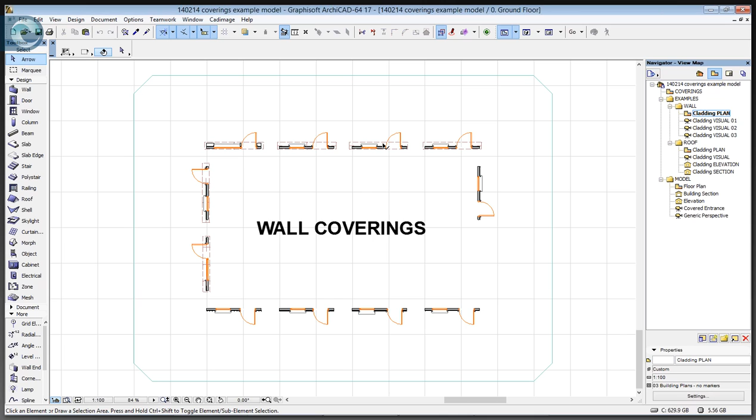If we take a look and just start off by showing you some examples, we're going to look first at some wall coverings. In 2D there's not a lot to see - we can see some of the upstands and overhangs on these particular windows, but there's not a lot to show.

So if we take a look at 3D, you can actually see what we're talking about. Don't worry too much about the hideous design of some of these elements - I've actually extracted these bits and pieces of walls with their coverings from one of the test files used during testing for upgrades or interim release upgrades through a product's lifespan, trying to throw all combinations of things at a particular surface so it can be tested.

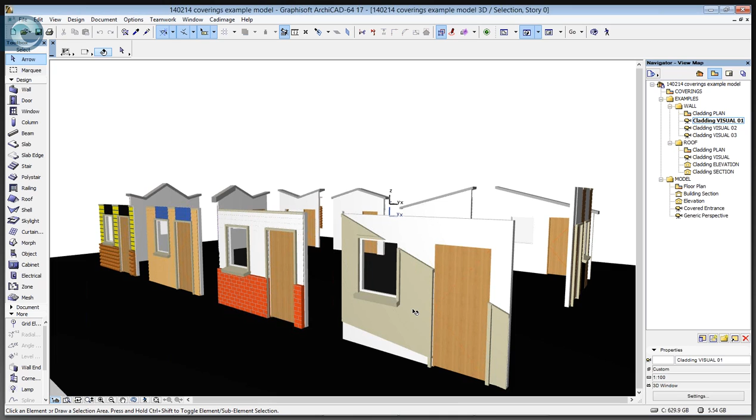You can see here, hopefully, we have different types of cladding running at all sorts of funny angles, hideous colours in different places - logs, weatherboards, tongue and groove, bricks, tiles. If we go to the other side it kind of gets worse - corrugated sheets, horizontal trimmers, vertical trimmers, trimmers that follow the profile of the roof elements.

The cladding can follow the roof or it can stop at a particular height, same for the base levels. And if I go to the final view, again you can see the random choice of colourings, but as I say, this is just to throw everything at a particular shape and check it works.

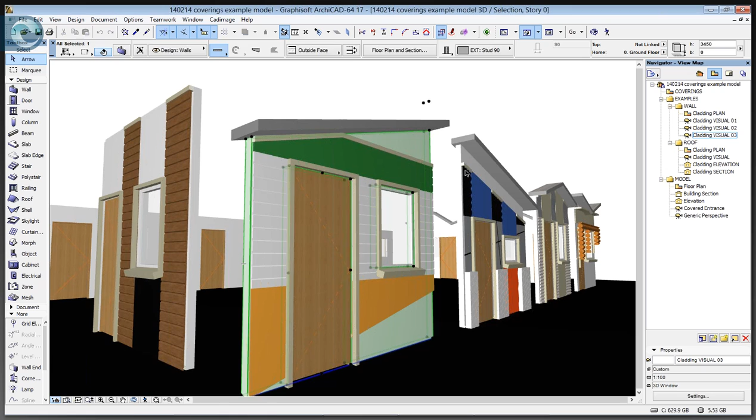The way it's actually working is the cladding is attached to a wall that sits behind the covering. As you'd expect, little things like if I take this door and delete it, the covering automatically repairs itself and reapplies across the hole that's now been filled in. So if I undo, and in the same way I'm going to stretch the window - the covering updates and heals itself, so there's not too much to worry about there.

So if I take a look at some roof cladding now, roof cladding is one of the tools that I love the most because of the way it does just the gutters and downpipes. I've spent hours and hours over the years positioning gutters and downpipes, but it's automatically created as part of our covering for a roof surface itself.

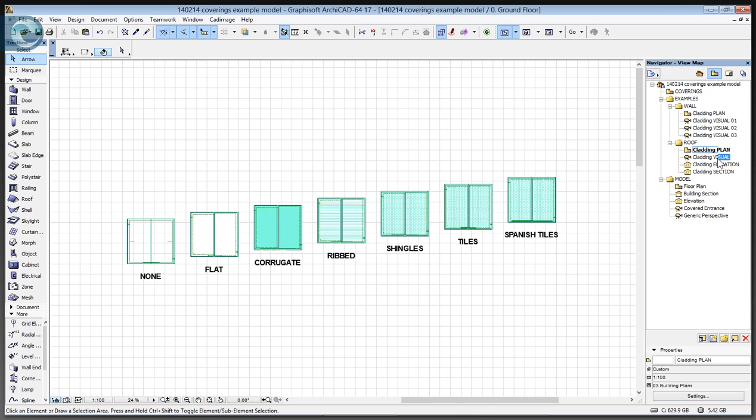There are 7 types of coverings we can apply. We can have no covering at all - let's take a look in 3D. These are just basic colours, but hopefully you can see some of the shapes going on here. Try not to navigate too much in 3D because it doesn't broadcast particularly well. The first one here is no covering at all, but that gives us the ability to have our trimmers, gutters, downpipes, fascia boards, boxed ends, whatever we want onto the roof surface itself.

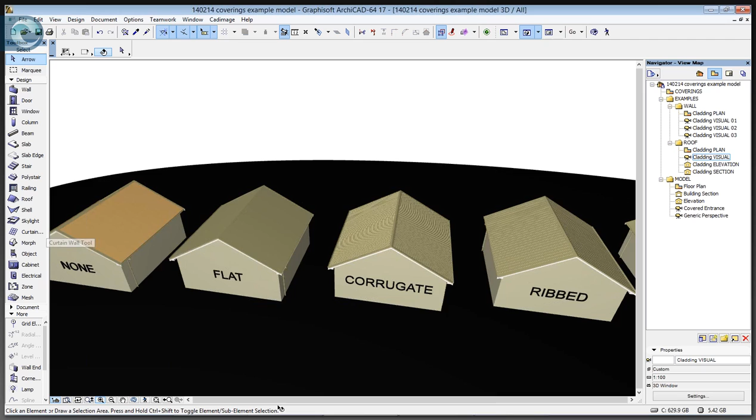There's then a flat surface which just puts, as the name suggests, a flat surface on top. We can have corrugated, ribbed, or standing seam as we'd call it more commonly here. We then have shingles, which if I select it you can see the contours a bit more clearly - I'll show you an elevation as well, but shingles are what we use in the UK to represent a slate.

We can set them to the appropriate size for that. We then have tiles, so traditional concrete tiles, and the last one here is Spanish tiles. So these are just different claddings, but all of the other trimmers and things are identical throughout the rest of the range.

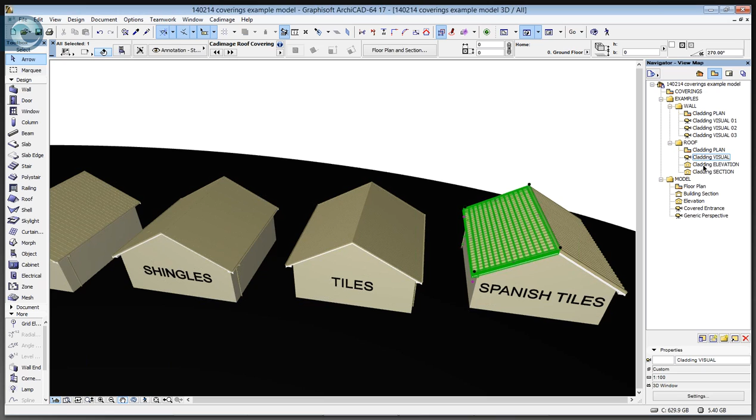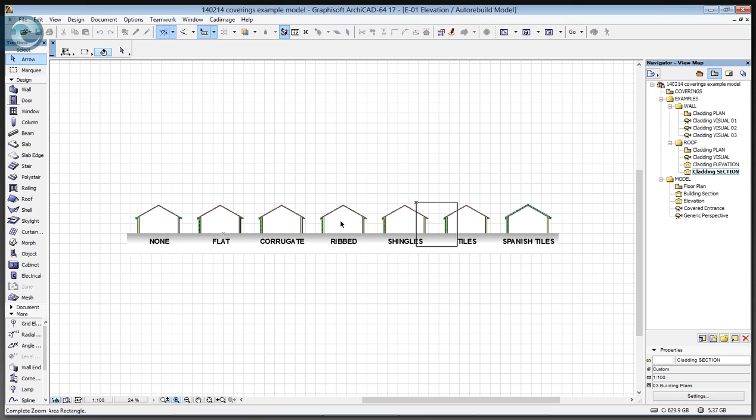Because we're not just looking at 2D, at the plan view, or the 3D, we can obviously get our elevations and sections from this same model. Again, you can see here the different surfaces. Briefly zoom in, you can see the way these appear in elevation. If I take a look at a section, maybe a section through one of these two here, you can see the gutters, the boxed ends, the soffits, the fascias, our downpipe, and all the other bits and pieces of detail that have been added here.

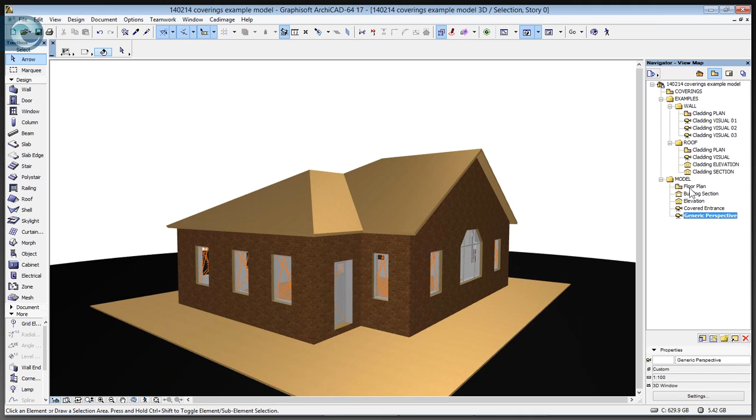So if I drop back to the floor plan, the way we add coverings is, I already showed you the pull down menu. We select an element and then we choose to add a covering to it. So let's start off with a slab. All I do is go Coverings, and I want a slab covering. What we can do here is either add a precast slab, or what I'm going to do in this case is add some decking elements.

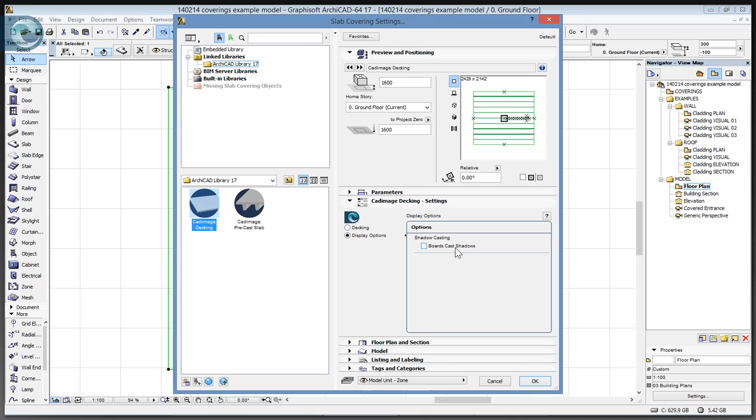In here we can choose the sizes, so I'm going to go for wide boards that are maybe 215 by 35, and I'll have a 5mm gap between them just to make sure it stands out. We can change materials - pine vertical at the moment I'll probably just leave. We can also change the appearance, the 2D appearance, what it actually looks like in terms of pens, colours, fills, etc. There's also an option for display options to choose whether or not we cast shadows with the board, so that's going to help increase the performance if we don't cast the shadows, because the chances of seeing them are pretty slim.

So it's a very simple object, and all we do is just click OK, and suddenly we have decking boards. This is an object that overlays what's underneath, so if I really want to, I can move the origin, and you'll see the boards move with it. So let's rotate it round to 315, and we now have diagonal boards across.

And then the other thing I can do is grab an edge, and we can actually put a trim board in place. So we can do that on the four edges, and that finishes off nicely what's going on in there. So that's our slabs, nice and simple.

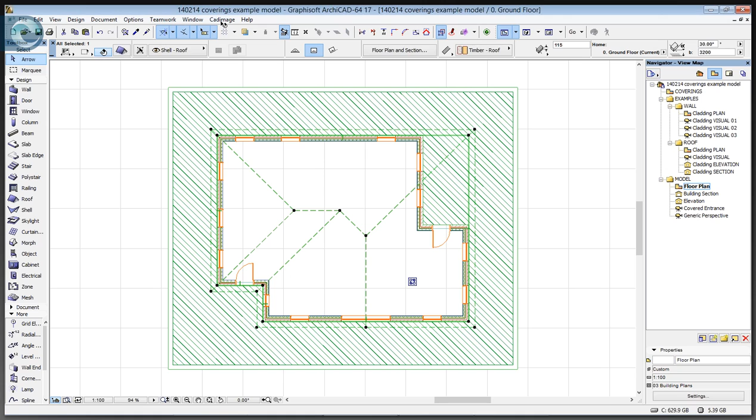But the next one I'm going to go for is the roof. So grab my roof, and again all I do is Cadimage Coverings and Roof Coverings. So in here I can play with a number of things. I can look at the default settings, but what I'll do is leave the defaults.

We actually have the ability here to pick individual faces. If we go in here, we can pick these individual edges of the roof, and then we can start to decide what type of finish it has. So we can override the ridges, the barges, the hips, the valleys, and the gutters. I'm going to start and just put something in place.

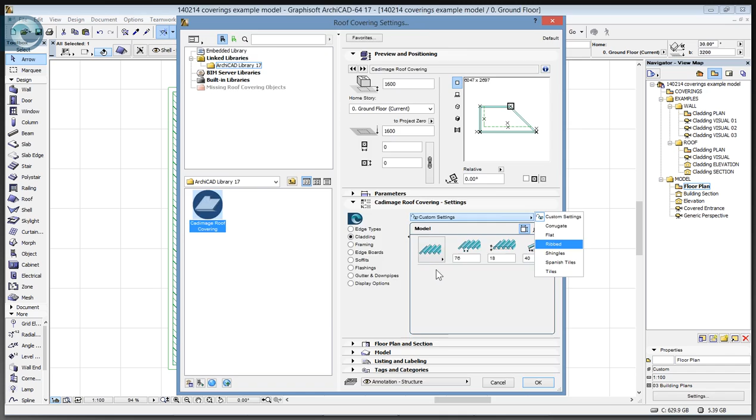So I'm going to go for cladding, and we will have shingles. If we have another look at 3D, we can now see lots of extra detail round about the roof visible up here. So if we go back to 2D, what I'm going to do is just pick up some of these roof elements to have a play with.

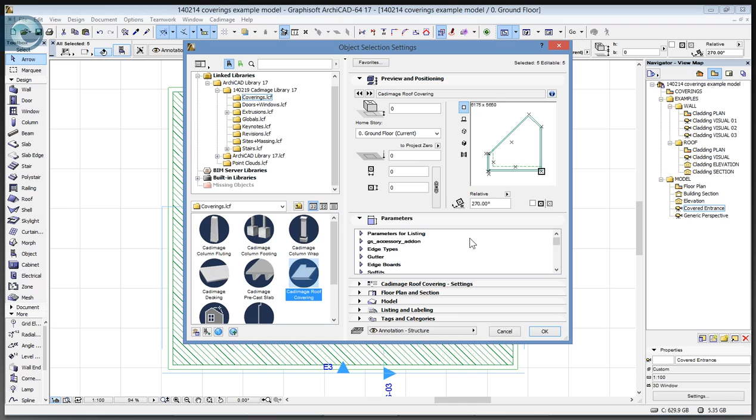We'll go into the settings, and then we can play some more with these particular settings here. So let's go for shingles. We'll set these for maybe 250 by 200. It's only 2mm thick at the moment, but a slate tile's probably 12mm, something like that.

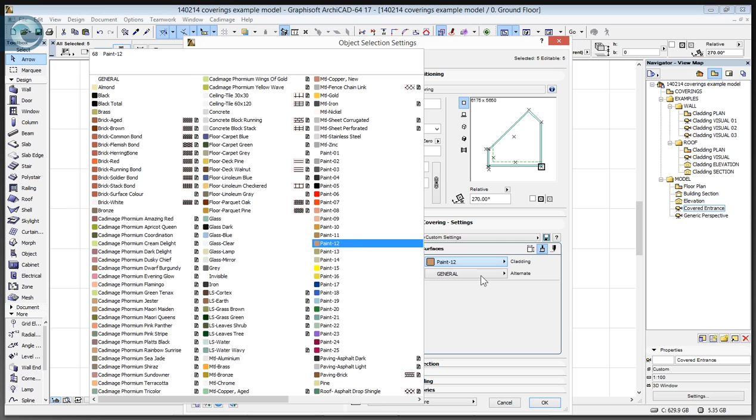Set an overhang. We have the option to change the materials, so this is going to be a sort of dark grey slate colour, and let's have a slightly darker alternate. We can then change our custom settings for the appearance, so pens, colours, fills, usual sort of stuff. We can choose to include the framing or not include the framing.

So on slates, we might want it, we might not, but it's a case of choosing what type of frame it is, what the sizes are, if the first batten is visible or not, and if we include the battens within the roof space or leave them separate. So I'm going to leave them switched off for now.

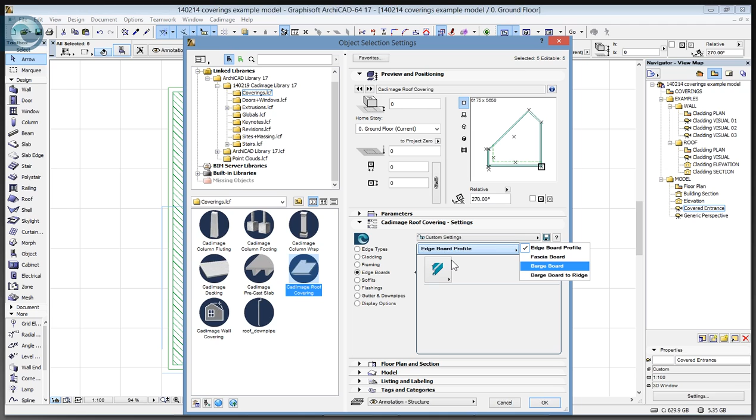We can then choose edge boards, and we have controls over fascia boards. We can set the edge board profile, we'll go for one of those. Again, we can change the materials. So the fascia, what I tend to do initially is make everything a really bright colour so you're able to see the detail of them within the model, and then come back and turn them into something reasonable. We can set the barge board to either match, or we can make it completely different, and the same for barge up to the ridge.

When I go to soffits, we have the option of flat soffits or sloping soffits. Set the various sizes for the overhangs, what we do with the ends, let's box them in. Again, we can set materials, so let's make the soffits - I've used red and yellow, so let's have blue and purple.

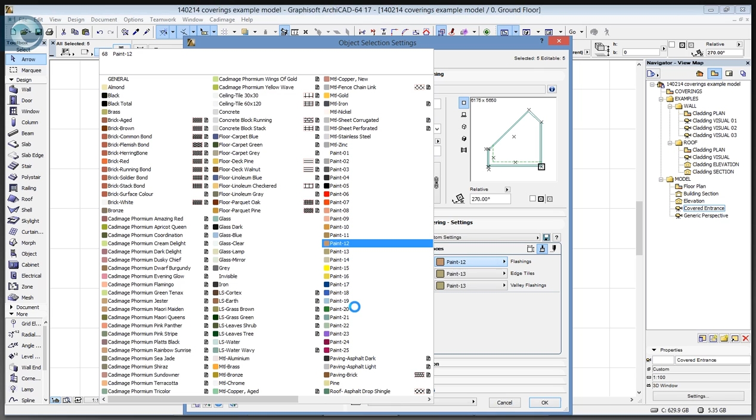We've then got control over the flashings - barge flashings, the hip, the apron, the valleys. You can go through the various settings, and there's a number of options that you can choose to give you whatever type of profile you want to be in there. So we can choose whatever options are necessary, and again there's further controls to set materials. I'm running out of hideous colours now, so let's have - I haven't used green yet. Green, dark reddy purpley colour, and there's paint 12.

Final couple of parts are the gutters and downpipes. So our gutters can form a number of different shapes. Let's go for colonial, set the various sizes, and we can set the materials. So the gutters we will make - what can we have? Let's just make them black this time.

And the downpipes, what we can do with those, they can either be round or rectangular. Again, set the sizes and the angles and the position of the brackets, the depth of the brackets, etc. But we'll just make these grey.

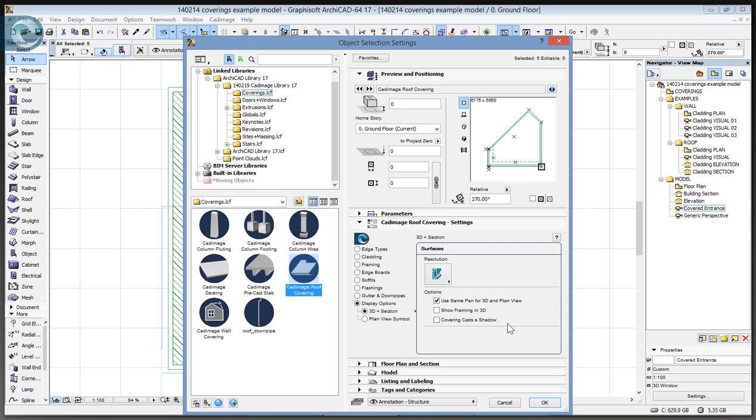Final option here is a display option. We can choose what's visible on the home story, above or below. We can set the 3D properties and the section properties, the resolution, the amount of detail, and whatever other information we need in there. So a whole load of changes.

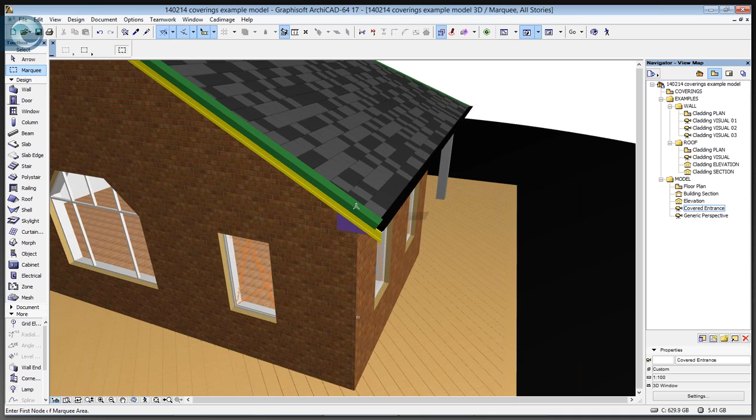If I just hit OK, what you'll see is the plan view updates, and it actually shows the tiles. You can see all sorts of hideous colours going on here, but hopefully if we spin up and come around to the edge here, you can see we have various different tiles going on, and the different types of trim. You should be able to see the gutter - it's hard to see because it's black, it might not have been a great choice after all. But you can see there's a whole load of detail that's been added there with relatively little amount of work. To do that manually would be quite considerable, and I've done it too many times.

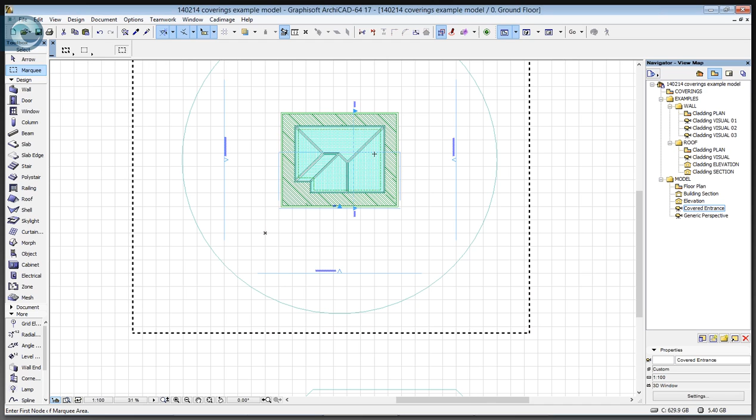So if I drop back to 2D, you'll notice there are no downpipes there, because it's up to us to choose as humans where we want them to go. So the way we actually place them is dead simple.

We select the object that is the covering, and you'll see there's a couple of hotspots on the corner. One of these is to manually cut the ends - if we were joining two completely different types of roof, we can cut the ends of the gutter off completely so that we can miter two roof sections together. The other option, the one I'm interested in, is this one here, where I just start to drag, and you'll see I've got my little profile visible, and this is the position of the downpipe.

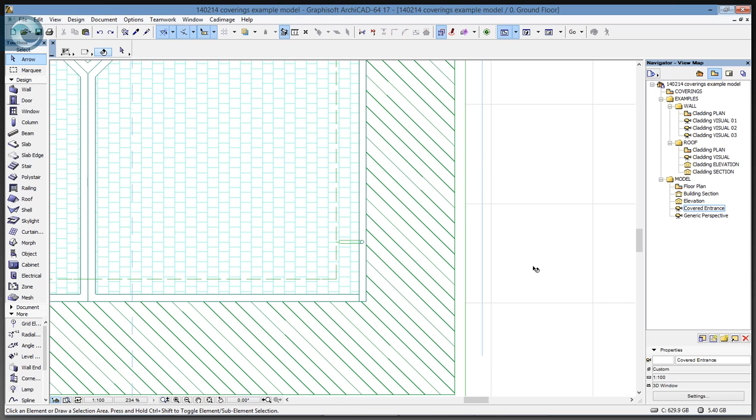So let's make it 1200 from the corner, and we'll do one more on the other side. Grab my roof, grab this, pull that in, this time make it 700. And if I go back to 3D, quick look back at 3D, you should see the downpipe's now visible. The only thing I have to do is select it and stretch it to whatever level is appropriate, so I'll take it down level with the base of the wall.

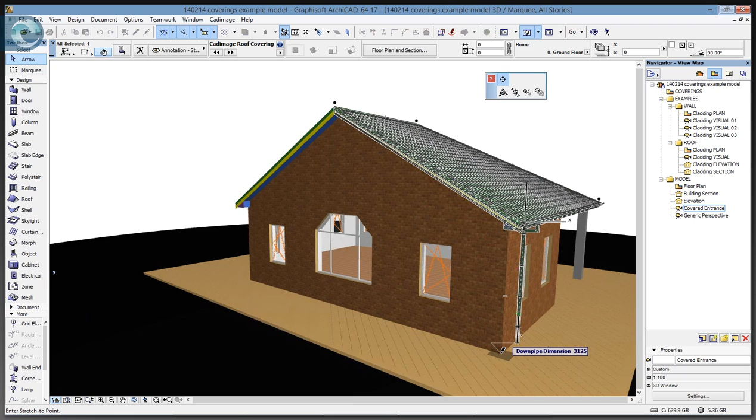So that's a roof covering with quite a bit of detail that's been added.

If we go back to 2D, what I'll do just to finish off is quickly throw in some wall coverings. So I'll grab my walls and do the usual Cadimage Coverings wall coverings. Again in here there's a number of options to look at, but I'm keeping an eye on time, so what I'll do is just choose to split into different covering types above and below the sills, and also above any openings.

So we can then set the shape. We want it to follow the wall, or we can set it flat for a particular height, follow up to a maximum height, or we can actually do custom shapes as well.

We can then move on and look at coverings. Because of what I've chosen, I've got 4 covering options. So the main covering, which is going to be the section in the middle of the wall, I might want to be panels. We can then set the panels to be, let's say, 300 high, 1200 wide, no offsets, and we'll have maybe 30mm of a gap, a shadow gap, between each panel. We can set the materials to whatever we want - I'm going to choose something that's pretty visual, so we'll go for yellow.

If we then look at below the sill, what I can choose to have here is some bricks or blocks. So we set the size - let's have 0 cavity, 100 wide, these to be 75mm high and 225 wide, and in the corners we'll go 112.5 just to offset the start point. What we can do is set the materials and colours, so we'll go for a kind of a brick type colour.

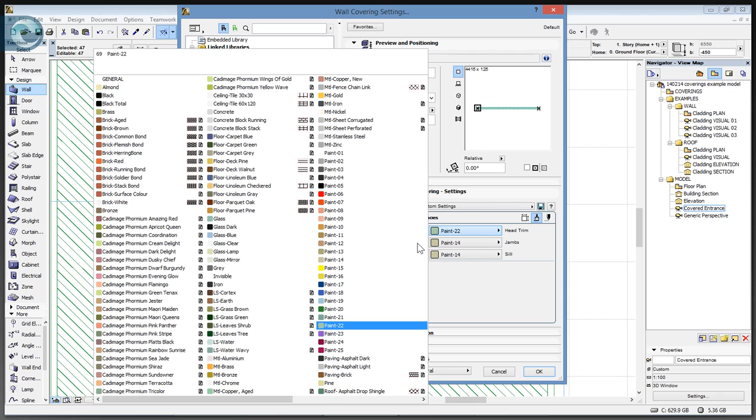We just literally grab it and off we go. So let's say the surround can be a block - set our various sizes, we'll have it above and below, set the materials so we'll have these as all green, linked together. And then the final options are again to do with the display options.

There's a whole host of options to play with. Hit OK. Final thing we do is say I want this on the outside of the walls. Hopefully you can see that now. I obviously have to do a little bit of work on the heights for the head heights of the window and the sill heights, but hopefully you can see the different surfaces - our brick below the sill level I've chosen, our cladding panels that are 1200 by I think 300 I went for, our vertical panels up here, and also our lovely log detail across the top there.

So I'm not going to be doing too much more in here. Hopefully nobody's joined that hasn't seen this before and wondered what they've actually created building-wise, but it was actually meant to be like that - that's kind of normal. All joking apart though, when I'm doing a real building with cladding like this, I do tend to work with these mad colours to begin with, because then you can identify very easily what's what, make sure the sizes and the construction's right, and then we go back and worry about the actual real finish that's going on these things.

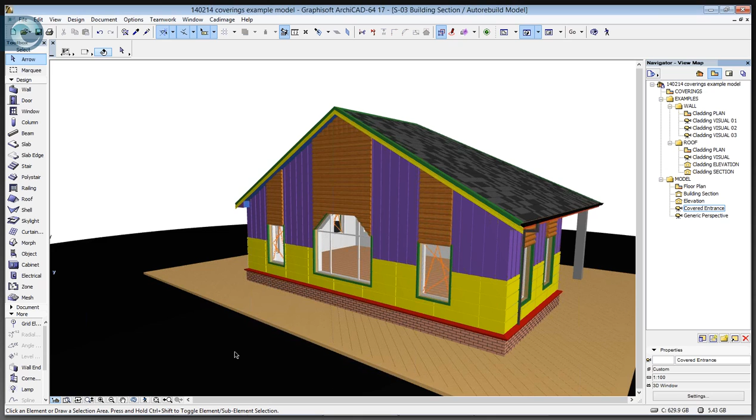So there's our cladding in 3D. If I just drop back to a section, what you can also see here is, this is part of the roof that I haven't yet fixed the depth of the overhang, but you can see the cladding that's applied to the face of that particular wall. You can also see the profile of the gutter, and the slates are in place. If we go to the top here, you can see we have a ridge piece that's bridging the gap over there and closing off what's happening at that point.

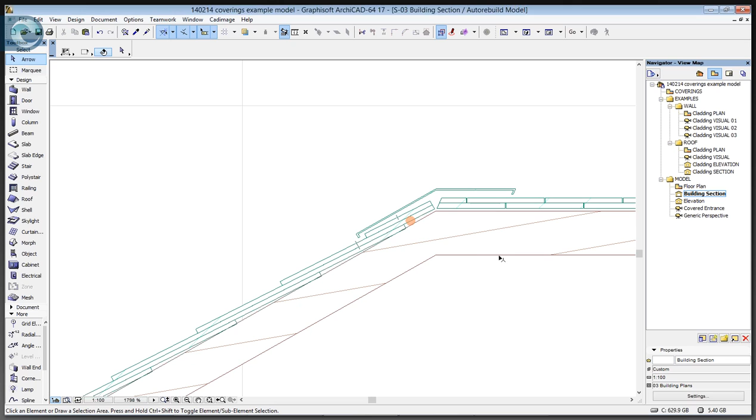If we then look at elevation, you'll see the scale of what I've created. Since it is an elevation, I can go into the settings and change the properties so it shows as coloured - shaded, not vectorial hatch, and with shadows. That allows it to recalculate and show the elevation with the colours I've already chosen. So that's a brief run over what's happening here.

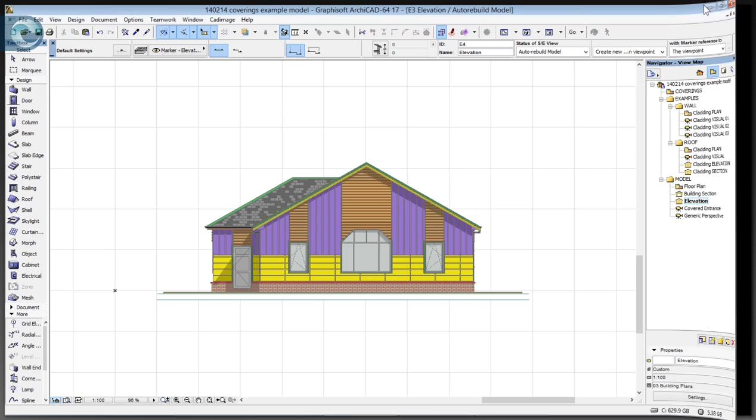What I'm going to do is drop back to PowerPoint. So back in PowerPoint, just a few bits to finish off.

One thing users are potentially concerned with, because they may have had bad experiences in the past, is the development process. What I can say is that Cadimage work to the same release cycle as full ArchiCAD. The development team have a close relationship with Graphisoft Hungary, so they know the development plans from Graphisoft and can bring our own tools in line with those upgrades.

Although we cannot categorically promise we will deliver version XYZ in time for the release, what we can say is that if you go back over the last 7 versions, we have delivered on time for the release of that full version. ArchiCAD 17 I was involved with myself, and I know that in the UK the tools were ready about a week ahead of the actual availability of full ArchiCAD 17 for users, so it's every intention to deliver on time.

The focus with any of the upgrades is always making sure any bugs have been fixed and bringing in enhancements to work with the latest technology that ArchiCAD can offer.

In terms of resources, if you want to find out more about the products, the tools and availability, you can take a look at cadimage.com. This is not just about the Cadimage tools, it's a complete portal for ArchiCAD content, so there's tips and tricks and movies. There's a knowledge base with tons of useful information about all of the tools and how they work, installation tips, and all these sort of things.